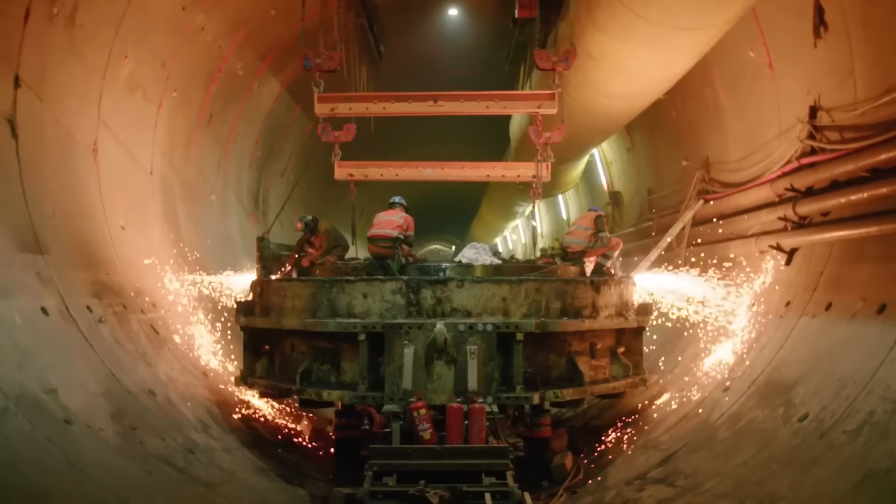The Alps are a majestic mountain range, undoubtedly shaped by nature for us to admire. However, something big is currently happening in the part of the range between France and Italy. These two countries have decided to dig toward each other, working on one of Europe's largest transportation mega projects in history. The project has a budget of around 10 billion euros, enabling millions of tons of alpine rock to be gradually transported beyond the European mountain range using advanced tunnel boring machines.

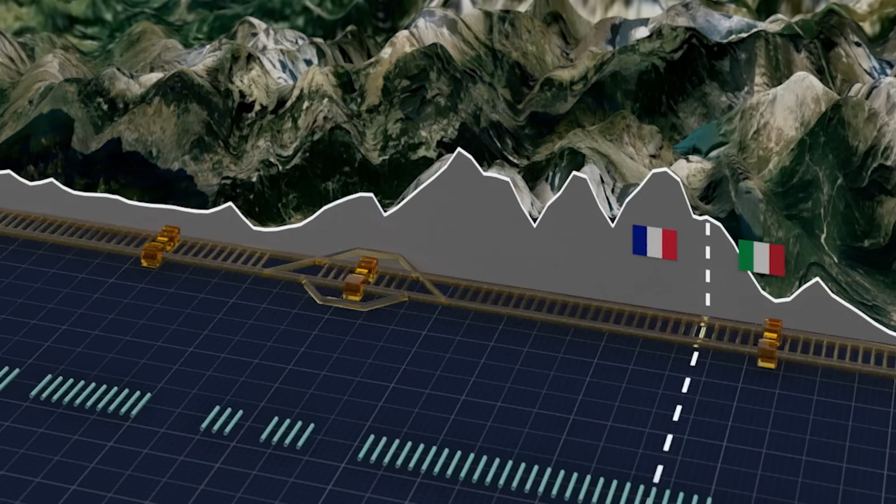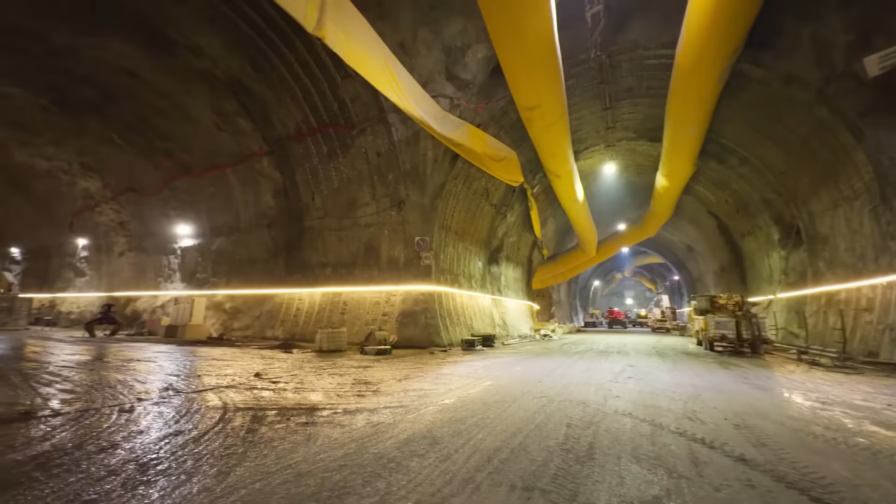And it's not just 2 or 3 of them. This mega project employs a total of 7 modern tunneling giants, which by 2027 will be operating simultaneously across 15 different sites. What's the end goal? France and Italy plan to revolutionize transportation between each other. Surprisingly, they also aim to enhance links with the Iberian Peninsula and Mediterranean coastal cities. Let's find out what's happening.

France and Italy have been so closely connected for so long that a railway between them was inevitable, despite the formidable barrier of the Alps. And indeed, such a connection exists. The Turin-Modane Railway, which passes through the Fréjus Tunnel. Every section of this 8.5-mile-long tunnel runs beneath the Alpine Mont Cenis mountain, making its construction incredibly difficult. No, you don't understand. It's extremely difficult because it was opened in 1871. Since then, including in the 21st century, trains have carried passengers and freight through it.

Yes, the tunnel has been modernized many times, but given its location in the mountains and its age of 154 years, issues are inevitable. In fact, the issues are so severe that France and Italy struggle to make the most of being neighbors. The first thing to mention is the gradient. In Fréjus, it's over 3%. That might not sound extreme, but in reality, this figure indicates reduced efficiency for the railway route through the Alps.

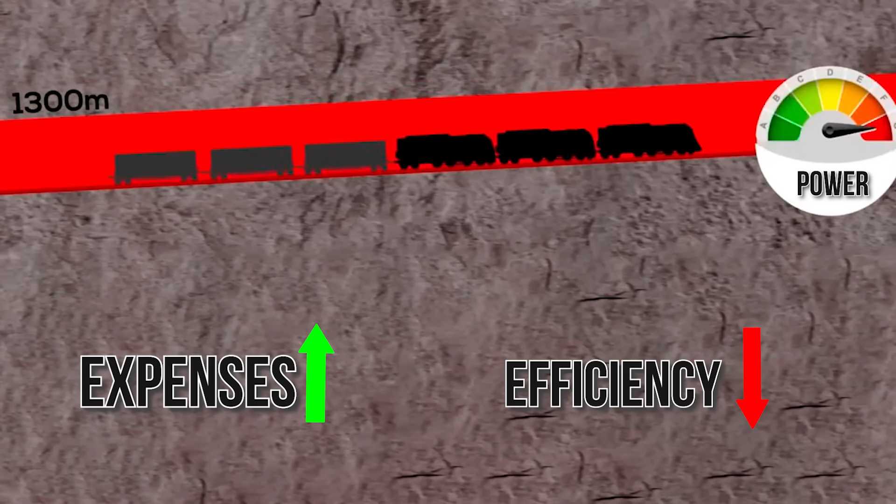Imagine walking down a straight road with no incline. Sounds pretty easy. Now imagine walking up a sloping road. Much tougher, isn't it? And what if every 330 feet the road climbs 10 feet? That's the kind of 3% slope the tunnel has. No wonder trains also struggle here. They need additional locomotives to generate enough power to get through the tunnel. This is a major blow to the economy. Higher expenses lead to lower returns. Worse yet, because of the slope, trains are limited to speeds of just 37 to 43 miles per hour. And time is money. You get the idea.

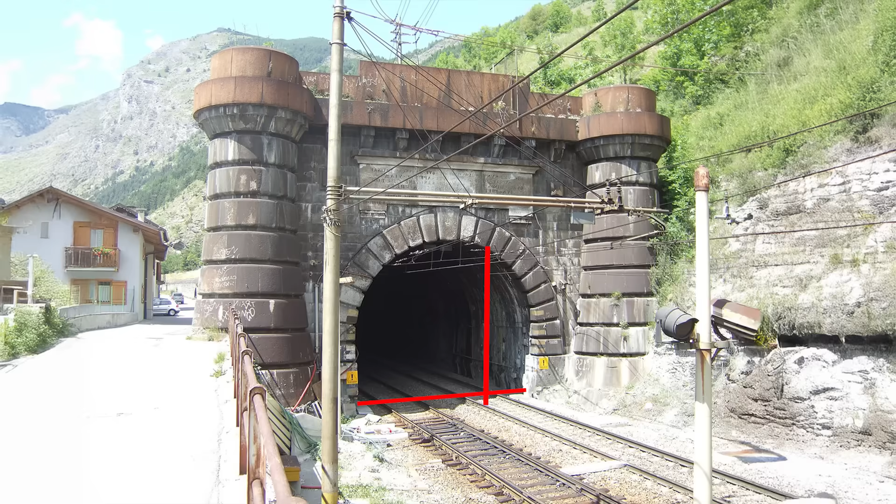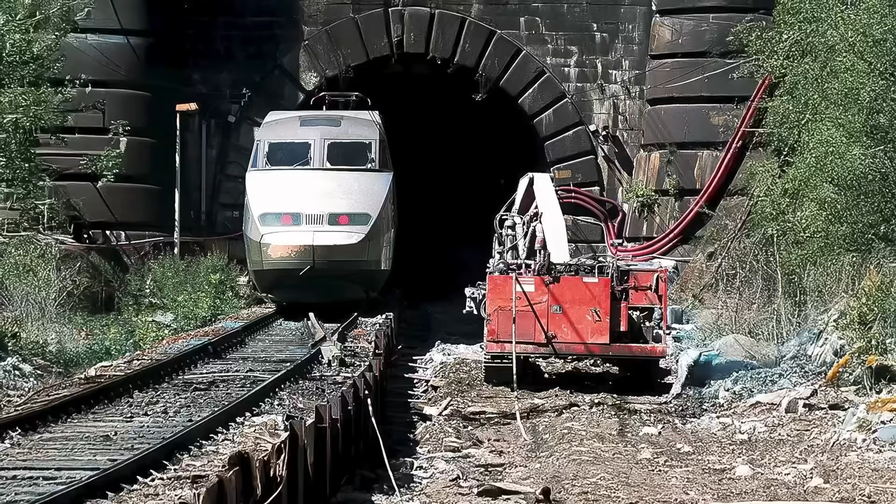Now let's look at the tunnel entrance. The height of the mountain route's profile and its overall dimensions weren't much of an issue before, but now there are serious limitations. For example, this height doesn't allow the use of modern high container platforms, so rail operators either have to make trains longer or transfer cargo to lower wagons before entering. The Fréjus Tunnel is also single track. Yes, even though it looks double-track in photos, there's actually just one railway line inside the tunnel. Because of this, oncoming trains have to pass each other in special sidings near the portals, which cuts the daily capacity to about 60 trains instead of the claimed 80 to 90.

Besides, France and Italy use different electrification systems, so they have to stop at a certain point, wait for the locomotive to be swapped, and only then continue the journey. This adds an extra 20 minutes to every trip. Yeah, there's a way to avoid this, using expensive dual-system trains. But again, that means less profits. All this points to just one thing. It's time for the 150-year-old Transalpine old-timer to retire. And retire it did. Problem is, nobody was ready for this.

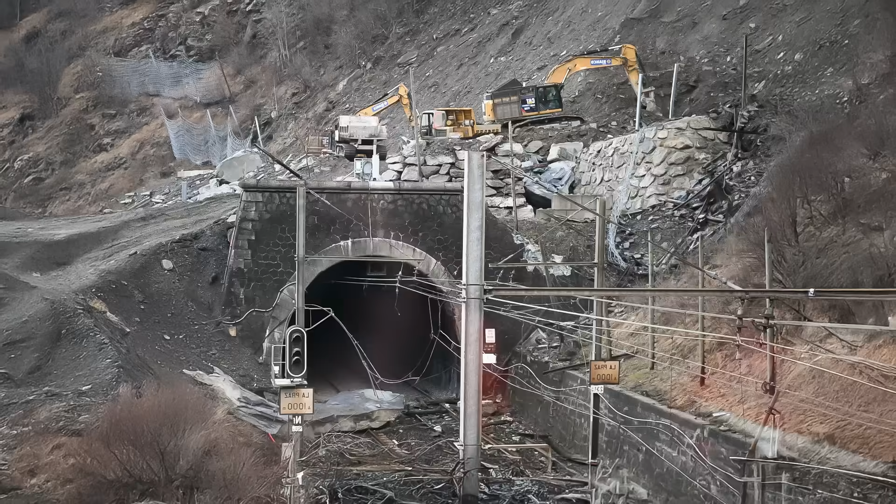In August 2023, a landslide on the French side of Fréjus badly damaged the tunnel. Because of this, the mountain route required, as officials say, a complex technical fix, clearing out tens of thousands of cubic feet of loose material, shoring up the landslide-weakened slope, and a complete overhaul of the damaged sections. All in all, it took 13 million euros. But that wasn't the real issue compared to the disastrous 15 months needed for the full repair of Fréjus.

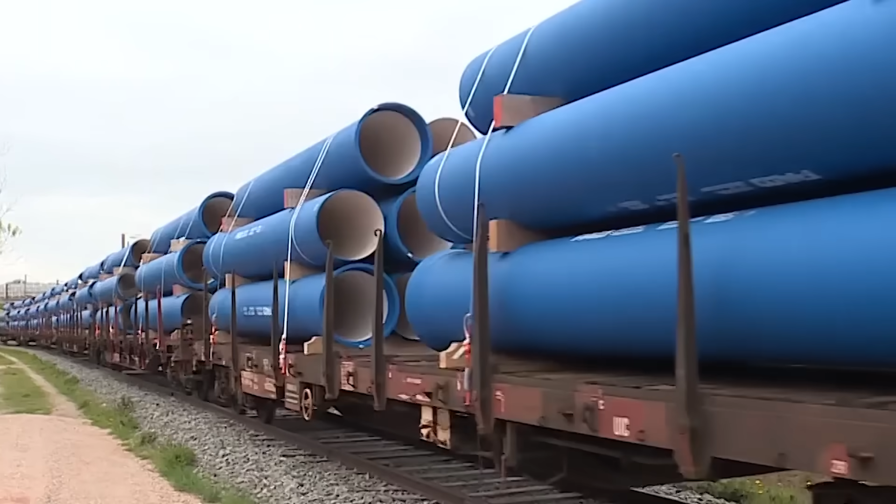Obviously, everyone still had to move goods somehow, even without the tunnel, so all the freight traffic was moved to 2 alpine road routes from France to Italy, namely the Wheeled Transport Tunnel, also called Fréjus, and the Montgenevre Pass. Now imagine what happens when cargo that was supposed to go by railroad tunnel suddenly shifts to the roads. Yeah, a nightmare for drivers and everyone around.

In the quarter following the railway shutdown, that is at the end of 2023, 371,903 trucks passed through the Fréjus Road Tunnel, nearly 40,000 more than in Q4 2022. And in 2024, it was recorded that over 1.1 million freight vehicles went through the Fréjus Tunnel. That's almost 20% more than in 2023.

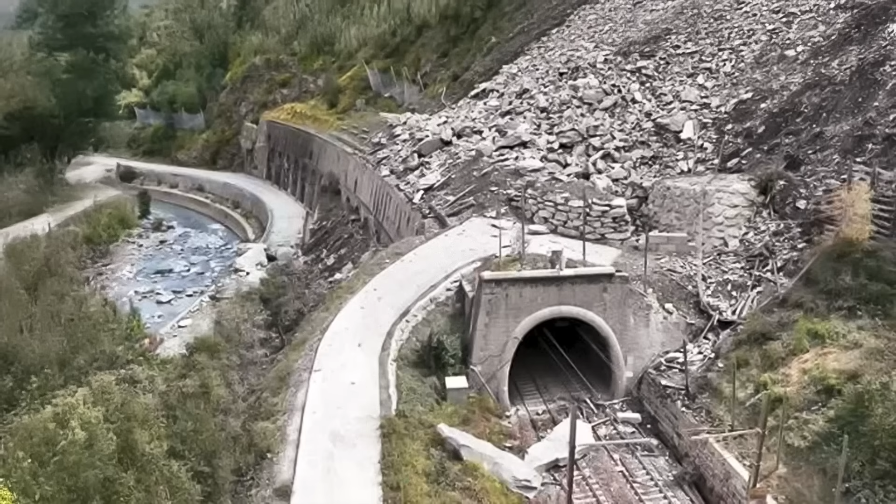Huge traffic jams spanning many miles built up. Frustrated drivers who just wanted to cross the Alps in their cars ended up stuck for hours, waiting for the endless line of trucks to clear. Naturally, companies shipping goods through the mountains from one country to another also suffered from these jams. Estimates put the total losses at 50 million euros per year. However, when trucks and cars were stuck in traffic during the repair of the Fréjus Railway Tunnel, drivers were already feeling relieved.

The 150-year-old veteran might come out of retirement, but there'd be no more need to travel through it. In the same Mont Cenis mountain, a record-breaking tunnel worth $8 to $11 billion is under construction, which will be a lifesaver for freight and passengers on the route between France and Italy. The new tunnel has been named Mont d'Ambin, and they've announced this is the most crucial and challenging part of the Lyon-Turin rail line under construction.

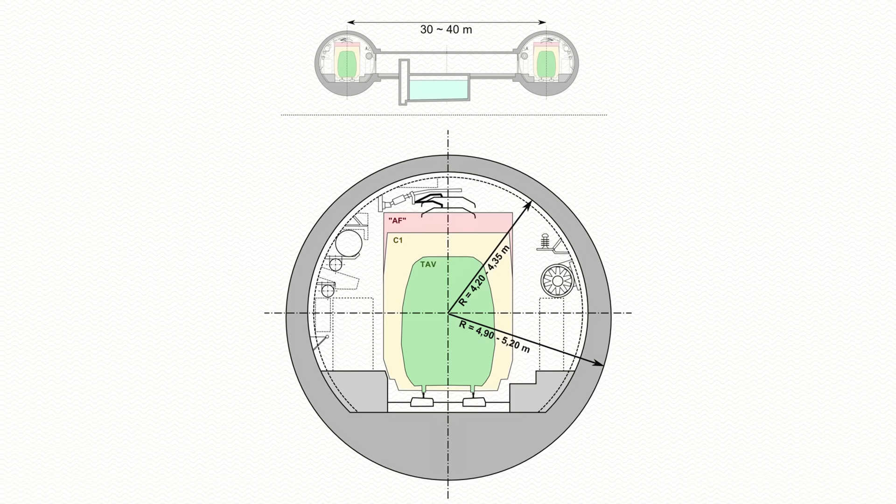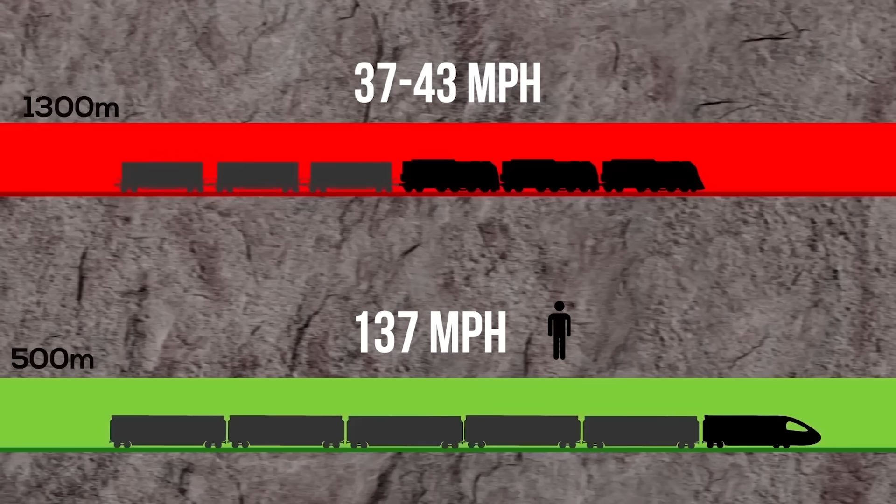It'll be a double-track structure made up of 2 tubes, each 27 feet in diameter. Besides, it's really important to note that its gradient will no longer be 3% like the old tunnel, but just 0.15%. Here, you can clearly see the massive difference in this factor between the tunnels. Due to the significant reduction in gradient and the modern design, passenger trains on this route will be able to travel at speeds of 137 miles per hour, while freight trains will reach 62 miles per hour.

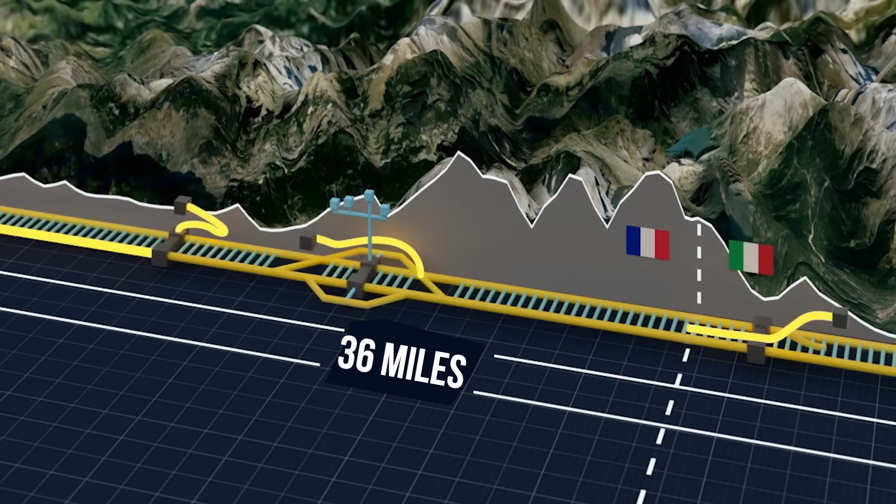And if the list of advantages still seems short, here's another one. The power supply inside the tunnel will be handled by the same system on both the French and Italian sides. Now for the most impressive part, the length. TELT, or Tunnel Euralpin Lyon Turin, the company in charge of the whole project, plans to build a tunnel stretching 36 miles. This would make Mont d'Ambin the longest railway tunnel in the world. But breaking the record won't be easy, and it's incredibly tough.

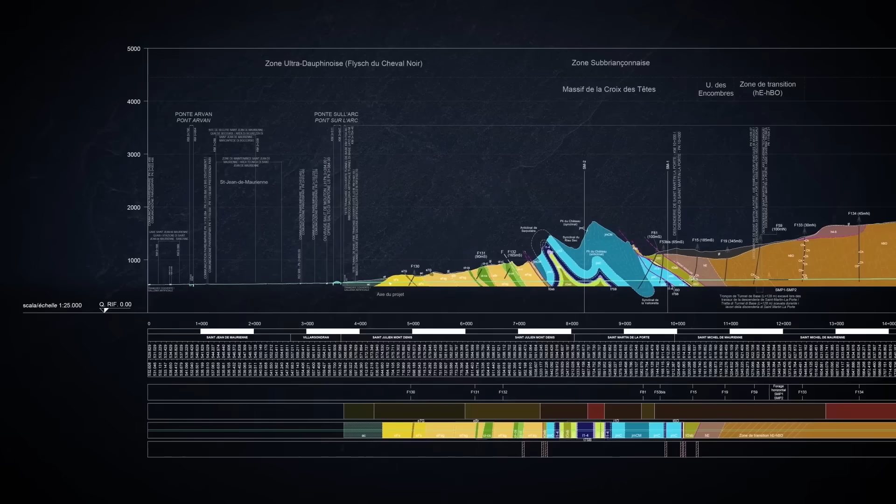First off, the Alps are an incredibly complex geological massif, featuring tectonic faults and a whole bunch of different geological zones: Flysch rocks, zone Subbriançonnaise, coal, zone Briançonnaise, as well as Piedmont schists. These formations are heavily deformed and mixed up with layers of gypsum and anhydrite, causing massive headaches for builders. And of course, this unique feature required large-scale preparatory work.

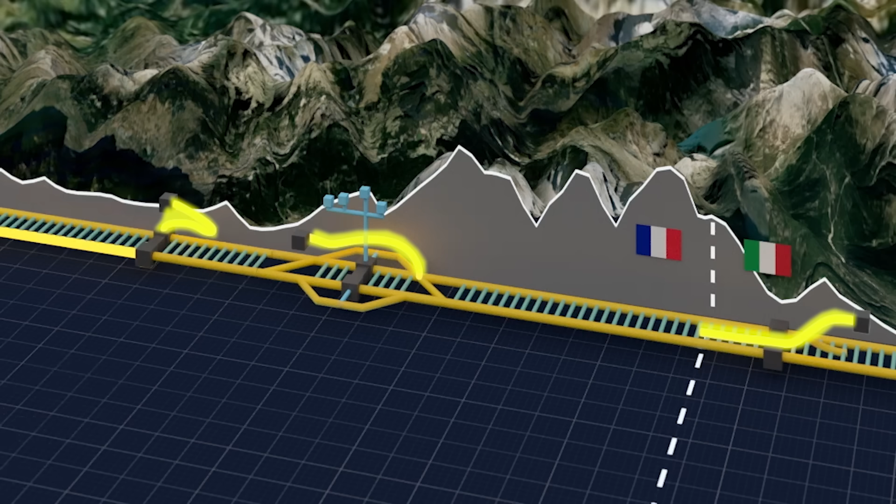Well before any construction started, geologists mapped the area precisely by drilling adits stretching roughly 14 miles in total. These give access to the main tunnel's path far below the mountain. For example, the 2.5-mile-long Villarodin-Bourget adit, built from 2002 to 2007, leads to the spot where huge underground chambers are being built, designed for assembling tunnel boring machines that'll head toward Italy.

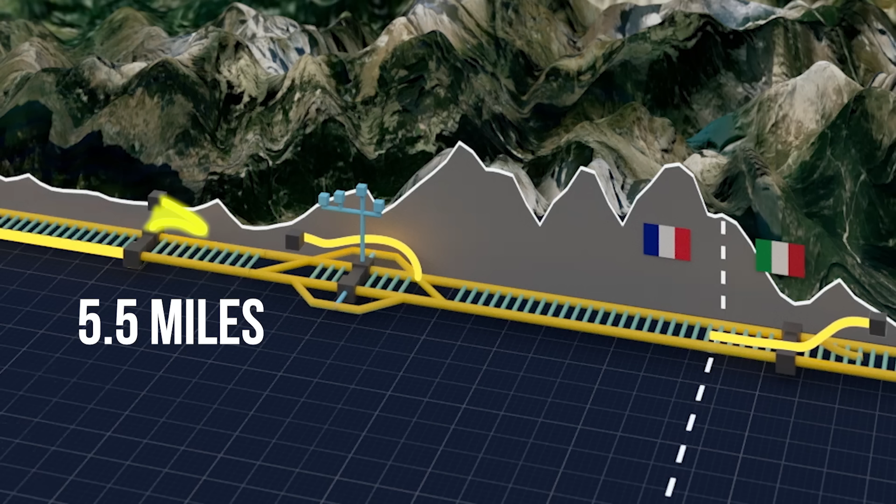The exploratory adit at St. Martin de la Porte is especially important. Between 2016 and 2019, a 5.5-mile section along the axis of the future southern tunnel was surveyed there. And you know what data was uncovered? Construction's actually even harder than they thought. The explorers learned about an extremely challenging area known as the Zone Houillère, or simply put, a coal basin. This zone is characterized by fractured and displaced coal-bearing shales, which endure intense compressive stress.

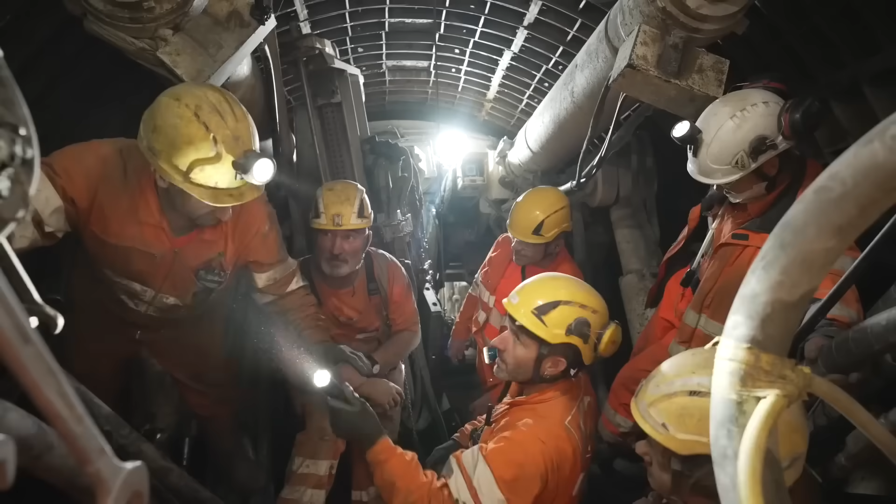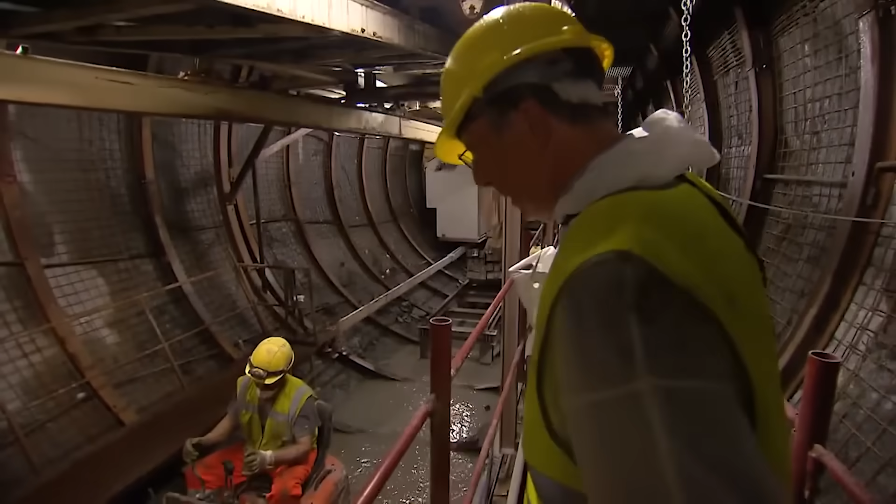After getting this intel, the builders faced a serious problem. You can't drill a hole through such a layer using a tunnel boring machine. Still, that hardly would have slowed down the builders. Back in the day, there weren't any tunnel boring machines either. They used drilling and blasting and other simpler equipment to lay the way. For the coal basin, they stuck to the same idea. If advanced drilling rigs aren't suitable, they just use traditional methods.

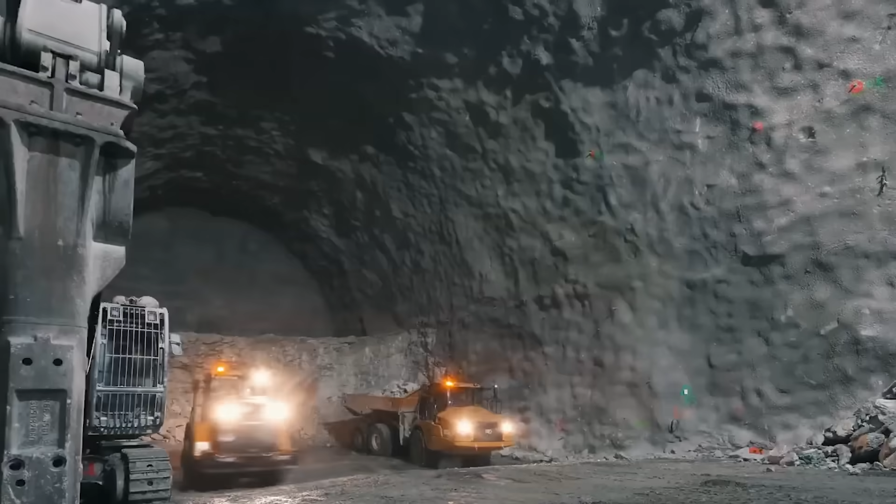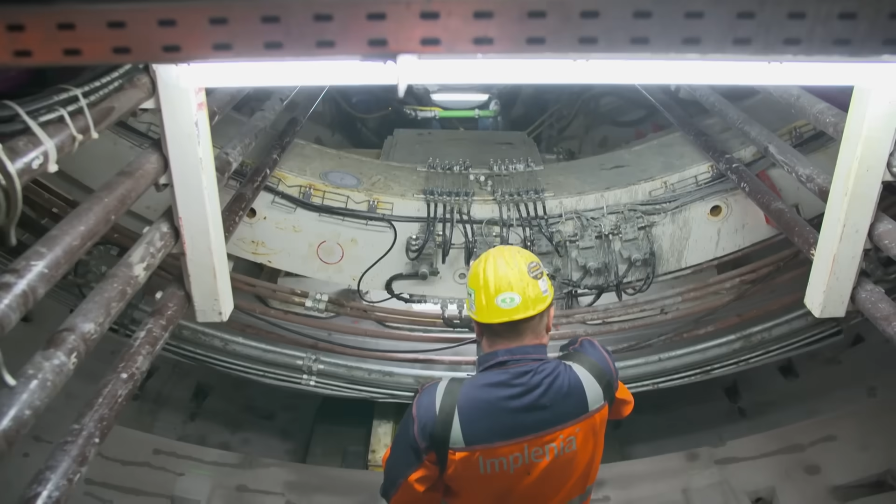That said, even though the coal basin is the most challenging section, some other areas aren't much better. The rock there also prevents the use of the most advanced tunneling equipment, so the builder's task is to alternate between different methods. All in all, it's a complex and, as a result, tough and time-consuming job. This is where Germany shows up in the video about the tunnel linking France and Italy. Enter Herrenknecht, a world-leading maker of tunnel boring machines. Their systems are the key to France and Italy pulling off this incredibly hard tunnel project.

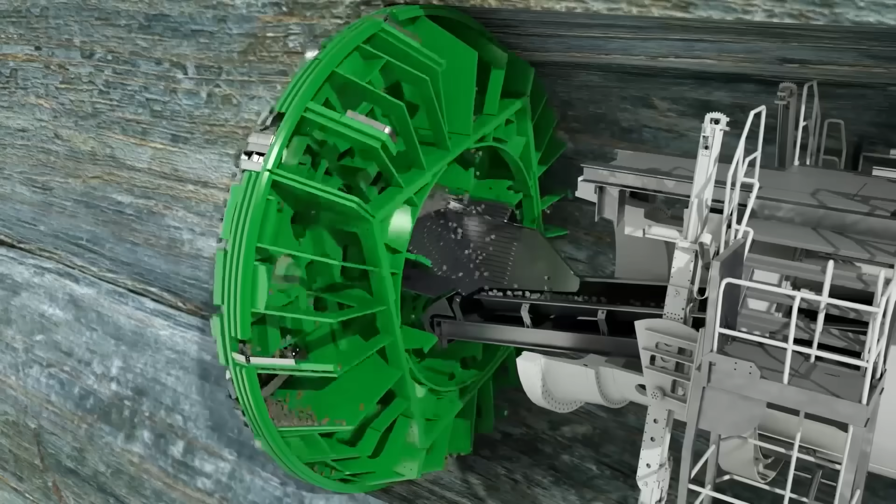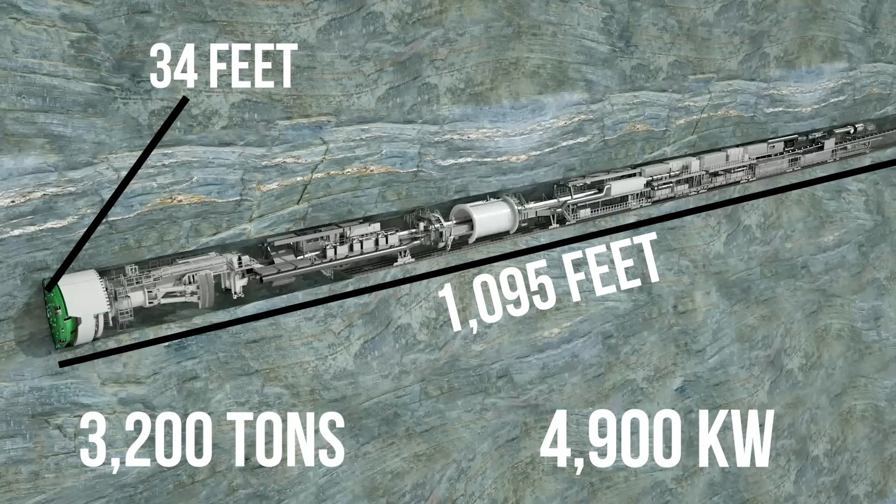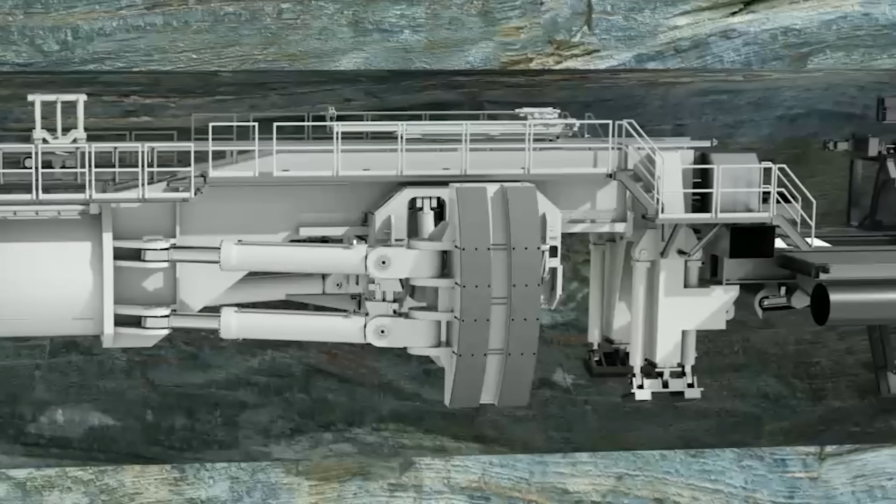For example, 2 identical gripper-type machines are being used to dig the 11-mile section from Villarodin-Bourget to the Italian border. These giants measure 34 feet in diameter, stretch 1,095 feet long, weigh 3,200 tons, and pack 4,900 kilowatts of power. These beasts are built for working in hard, stable rock under intense pressure at depths of up to 1.4 miles. They got the name gripper from how they operate. The machine braces itself against the tunnel walls with side clamps, then hydraulic cylinders push the cutting head forward.

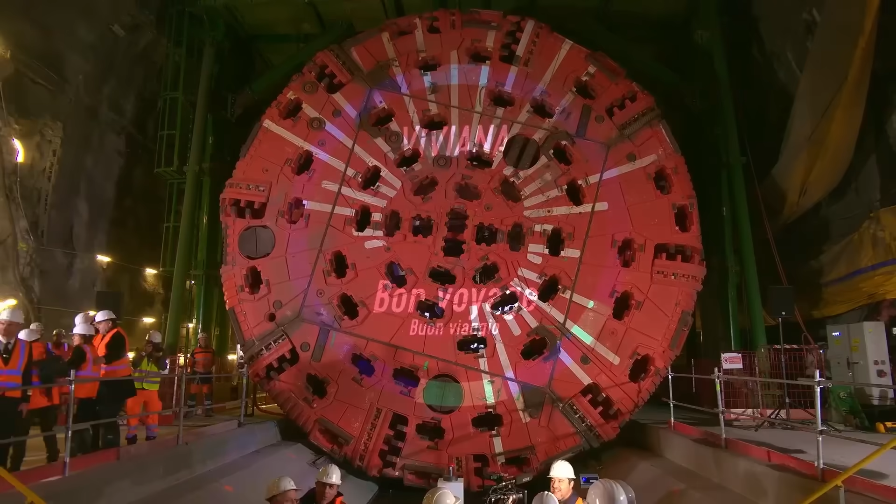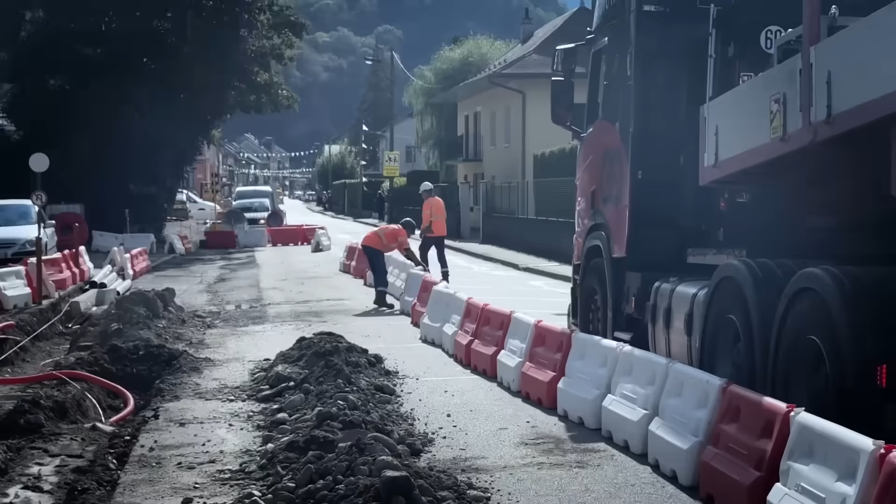For example, on April 1st, 2025, a machine of this type named Viviana was launched at a French construction site. It'll be digging a 5.6-mile section of the northern tunnel running parallel to a stretch already dug by another similar machine called Federica. Viviana isn't just a drilling rig, it's a full-on mobile factory. After drilling, it automatically sets up concrete segments to reinforce the tunnel. Plus, it's got a built-in conveyor system to haul the excavated rock to the surface, streamlining the process and allowing for material reuse.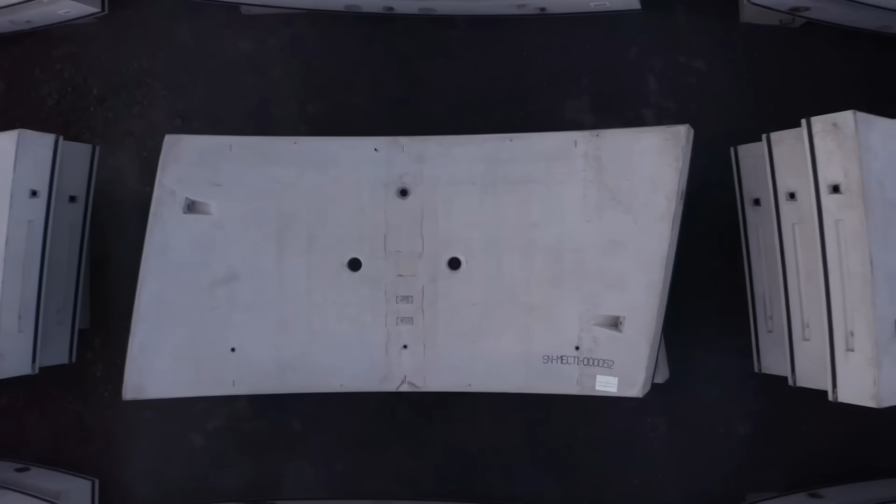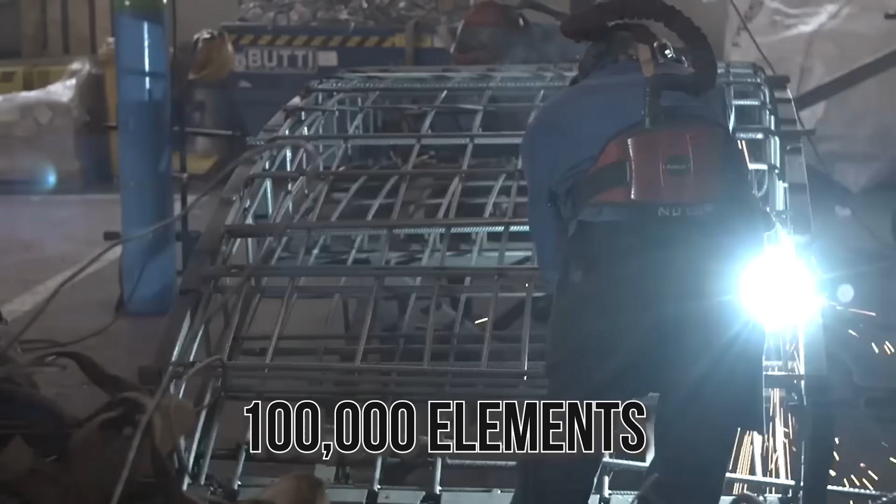And this is the robotic factory from WeBuild, where concrete segments for reinforcing the tunnel have been coming from since 2024. It really highlights the scale of the project. According to the plan, this production facility is supposed to make 100,000 lining elements, all specifically for the Alpine Tunnel. And honestly, this whole factory was built just for the Franco-Italian project. But let's get back to the tunnel itself.

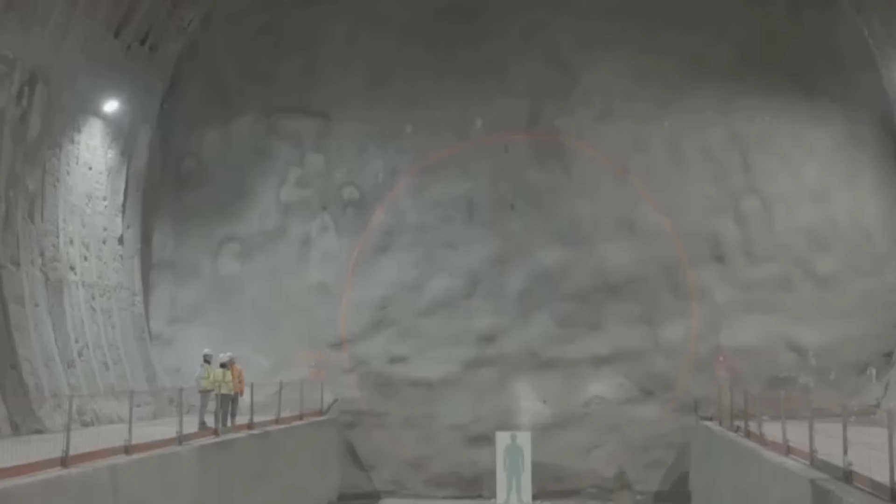These kinds of passages may offer good protection from bad weather, but if something happens inside, it's a disaster. That said, it doesn't apply to the new tunnel because TELT decided it should be the pinnacle of safety. So for example, the two tunnel tubes will be connected to each other by 180 cross passages spaced 1,092 feet apart. Why? Well, if something happens in one tunnel, you can move to the other. Plus, it makes maintenance easier.

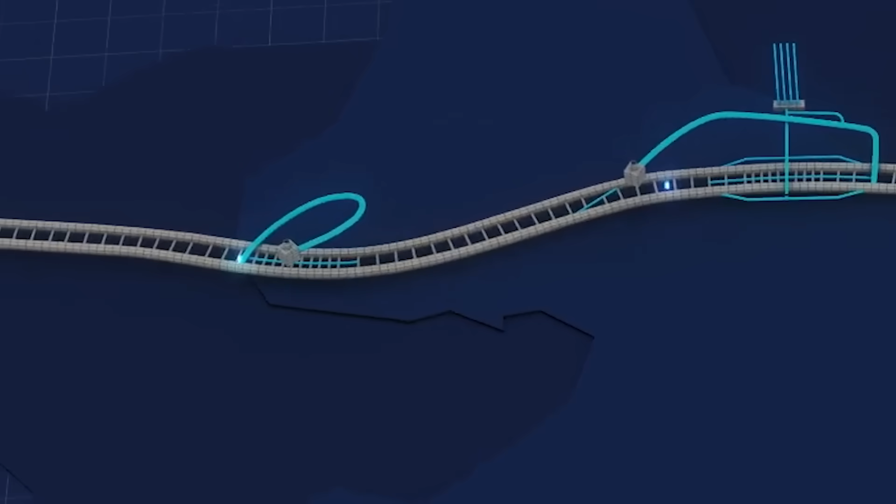Besides, the new tunnel will have 3 large underground safety stations, plus 2 similar outdoor zones. They'll be located near the tunnel portals. Each station will serve as a shelter in case of an emergency inside the tunnel, as well as a place to evacuate from if necessary. Of course, there will be stations with different equipment scattered throughout the tunnel to help during fires. Along with that, rescue teams will be on duty at certain points along the route.

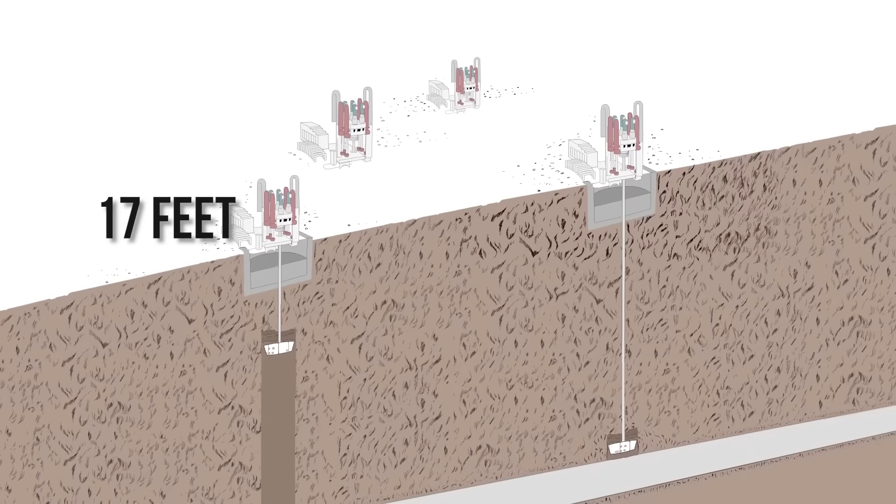If someone misses the source of the fire, no worries, it'll be caught on camera, and there will be a whopping 900 of them. And of course, there's ventilation, which, by the way, deserves special mention because it's one of the most advanced and complex systems of its kind in the world. 4 ventilation shafts started construction in the Avrieux area of France. Each one is 17 feet in diameter and goes down 1,640 feet deep, connecting to a tunnel.

The best part is that no direct human intervention is needed for the construction. Instead, they use an innovative method that involves first drilling a pilot hole from top to bottom to reach the base chamber, then widening the shaft from the bottom up using a reamer. TELT plans to finish both ventilation and other construction work on the new project by 2030. But that's not the end of it. Next comes the testing phase in 2032.

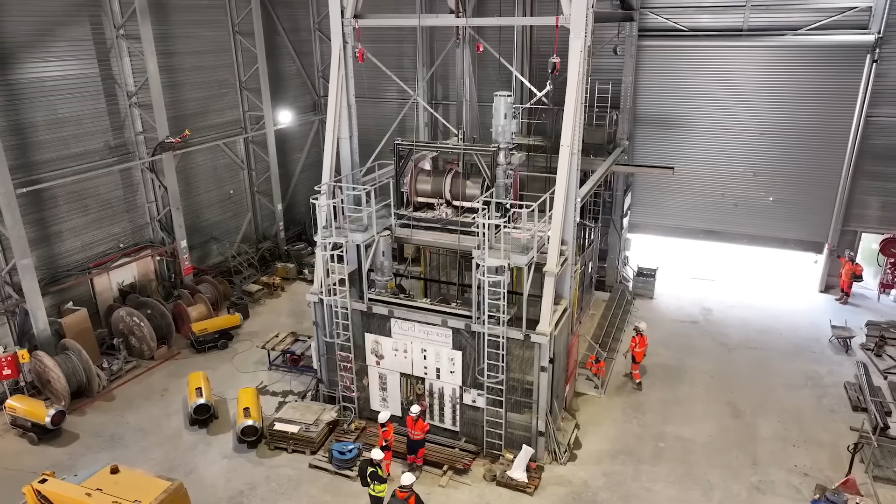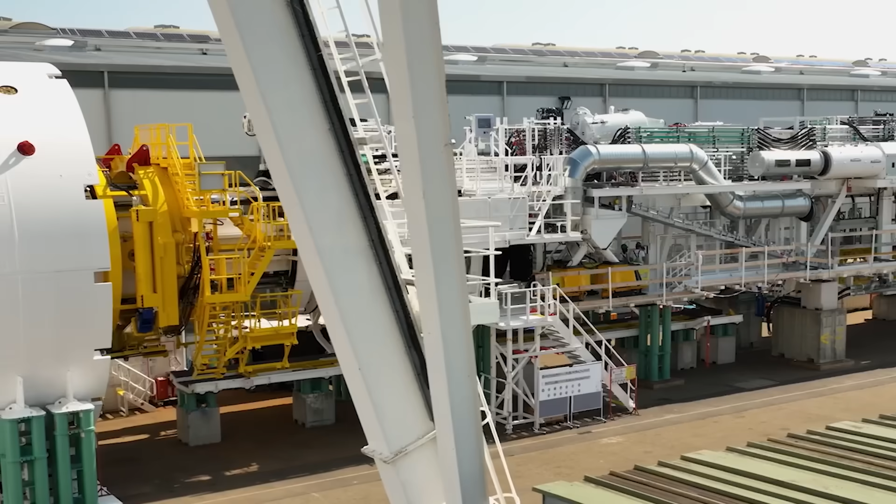That's when they'll run full-scale checks on all systems, the rail infrastructure, safety systems, ventilation under different scenarios, including simulated emergencies. And only after successfully passing all tests and getting approvals from French and Italian security agencies will the tunnel go into operation. All in all, way too many conditions have to be met for the project to start paying off on schedule. But one thing's for sure, the builders will give it their best because this new tunnel promises to open a whole new chapter in trade and passenger travel between the two countries.

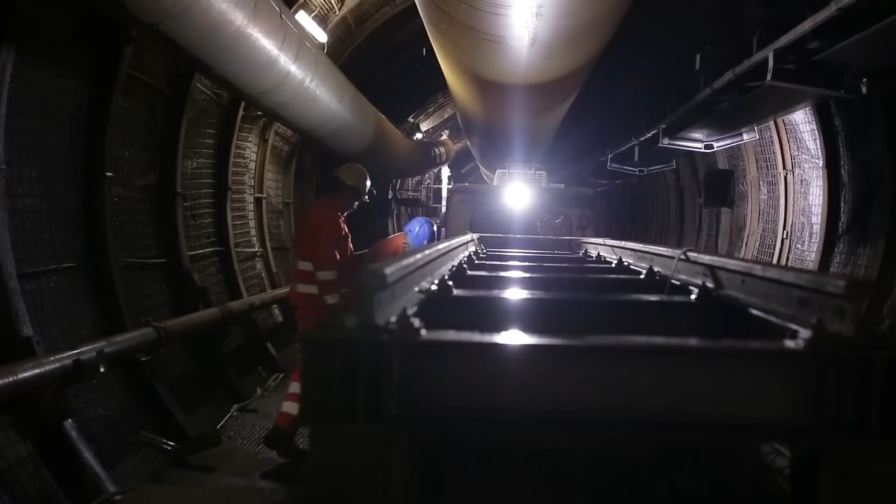As you remember, the 3% slope was one of the main issues with the old tunnel. Here it's just 0.15%. A huge difference, not just in photos and animations, but in real life too. Add to that no need to switch trains and higher speeds, and you've got fantastic results. Trade and other train movements between the two countries will become way more efficient because less spending will be needed. According to some estimates, freight costs could drop by 40% thanks to the new tunnel.

At the same time, the new line will allow trains with a load of up to 1,500 tons compared to the 600 to 700 tons of the 1871 tunnel. Plus, trains will run on 2 tracks instead of 1, making rail freight between the two countries a much more efficient option. Also, the completion of the tunnel will be a key step in the work on the Lyon-Turin rail route, of which Mont-Cenis is a part.

And when this Transalpine route is finally finished, it'll drastically cut down the time it takes to travel between France and Italy. For example, without the new tunnel route, the trip from Lyon to Turin takes 3 hours and 47 minutes. But once the new route opens, the journey will only take 1 hour and 47 minutes. That's a whole 2 hours faster. Travel time between other cities will also be cut down. You'll get from Lyon to Milan twice as fast.

Just don't be surprised if you notice fewer cars on the roads near the Alps. That's the future of road travel between France and Italy that TELT envisions. Once operational, the new tunnel is expected to take over 1 million trucks off Alpine roads each year. This won't just ease traffic, but will also cut greenhouse gas emissions by around 1 million tons annually. Plus, the new tunnel isn't just something France and Italy are looking forward to. Other countries are too, since it'll be part of the Mediterranean corridor.

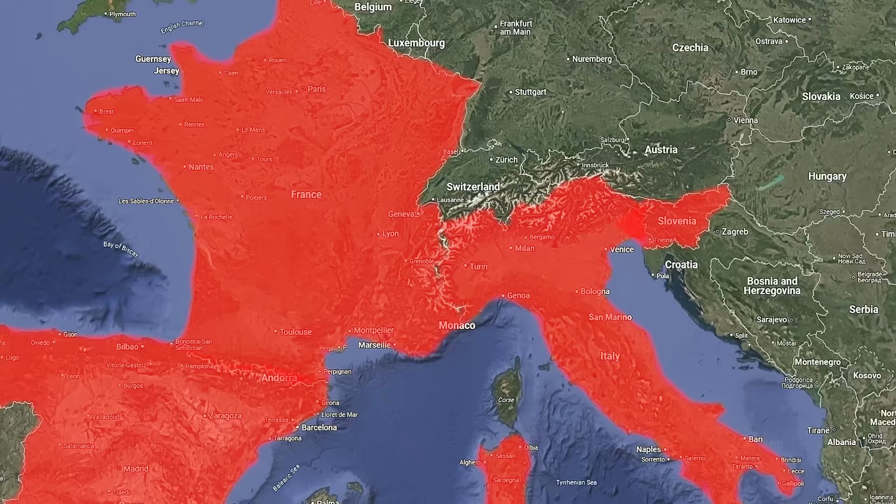This corridor is one of the EU's 9 major transcontinental routes, stretching nearly 1,800 miles from the Spanish coast through France, Italy, and into Central and Eastern Europe. It links key Mediterranean seaports with industrial and logistics hubs in Northern Europe, handling up to 170 million tons of cargo a year. As you can see, the corridor cuts through the Alps, so goods had to travel, for example, through the 150-year-old Fréjus Tunnel. The tunnel was a bottleneck, holding back the entire traffic flow.

With the new Alpine route coming into play, everyone involved in the project and those managing the Mediterranean corridor expects big changes. Trains will move cargo from the coast inland to Europe more efficiently, which will be a motivation to increase trade by rail. One tunnel, so many benefits. Can't wait till it's finished because, let's face it, this could be a real transport revolution.